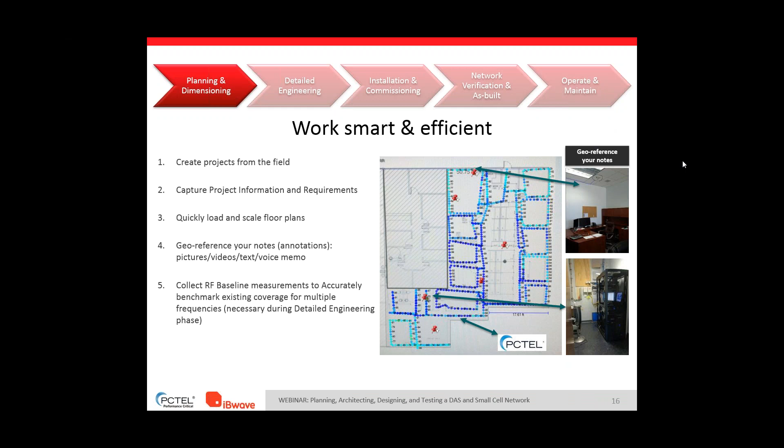So what I'd like to do is go over the best practices, strategies, and cautions of the three types of tests that will be performed during the planning and dimensioning phase of the process. First would be spectrum clearing, done for both DAS and small cell deployments. Baseline survey as well is done for both DAS and small cell deployments. And then finally, pre-deployment CW testing, which will also be done for both deployments.

We'll start with spectrum clearing, and the purpose of spectrum clearing is to determine that the channels being deployed are clear from interference. With new bands being deployed and old bands being used for new technologies, it's really important that spectrum clearing is performed and performed accurately. It's also used to provide clear frequencies for the CW testing that will be done during the pre-deployment CW testing, which is very important to make sure those frequencies are clear of interferers so they can provide an accurate input into the design tool.

Next is the baseline survey.

The purpose of the baseline survey is to identify what the current coverage from the macro site is in the building or venue you're designing. We look for gaps in coverage and use this to determine coverage objectives for the system. It's also used to identify which wireless service providers are in the building, especially for neutral host deployments.

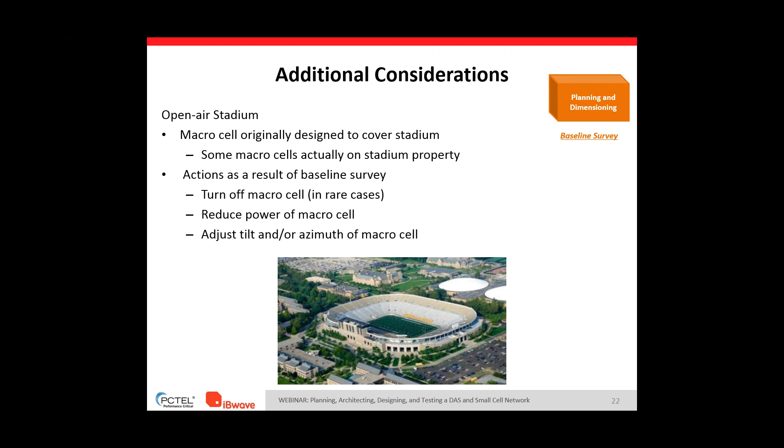For pre-deployment CW testing, the purpose is to determine the RF propagation characteristics of the venue. It provides a very important input to the design tools so they can optimize the prediction models. It can also be used to validate preliminary designs, so we can determine if anchor antenna locations are acceptable for the design.

It can also be used to determine soft handoff locations and percentages by setting up two different transmit locations on different frequencies that are in adjacent sectors. You can determine whether those soft handoff regions will provide the appropriate targets, so your soft handoff areas are not too large and starting to eat up your throughputs.

It's a direct input to the design itself for model optimization. You want to accurately report all intended coverage.

Accurate scanning receivers with high data density is important so that you can make sure you're getting enough data to tune that model. You want to test all bands simultaneously so that as you turn up a CW test, all bands are accurately being modeled, and you understand what the propagation is going to look like in a building, including penetration losses through different media like glass, drywall, wood, cement, floors, and ceilings. You want to collect enough CW data that the models can be tuned for that.

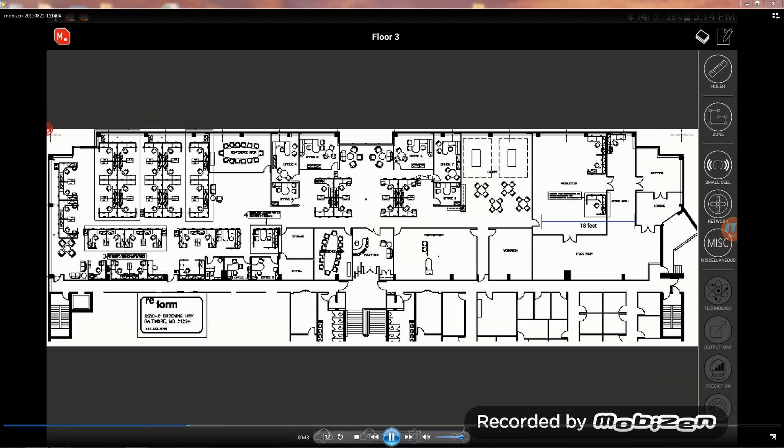So with this, we have several floors, and I'm going to select floor 3. The layout for floor 3 is here, and I've already pre-scaled the 18 feet distance on this layout that you see here. Now I'm exporting this right to SeeHawk Touch.

With SeeHawk Touch now, I have to detect the device, the iBflex scanner, to be able to collect data from it. Right now it's through a Bluetooth connection that I'm finding all the scanners out there that have Bluetooth. In this case, in our building, we have 3 of them. The one I'm using is a 7041 scanner.

So with the scanner now, I have the data imported from the floor plans imported from iBwave Mobile Planner. I'm selecting floor 3. In the interest of time, I have set up a predefined setup, which we call a workspace, defined as the iBwave LTE web. It's the upper 700 C/D band that is in this workspace, and I'm going to plot the RSRP, the reference signal received power, instead of the RSRQ that came up as the default value.

Once I apply this, because that's a very important parameter, I'm now going to do a walk test I've done previously and show that to you. First I'm going to select the starting point on this walk test, which I've done. I'm now going to record that, and I have the option of changing the name of the file of where the data is loaded.

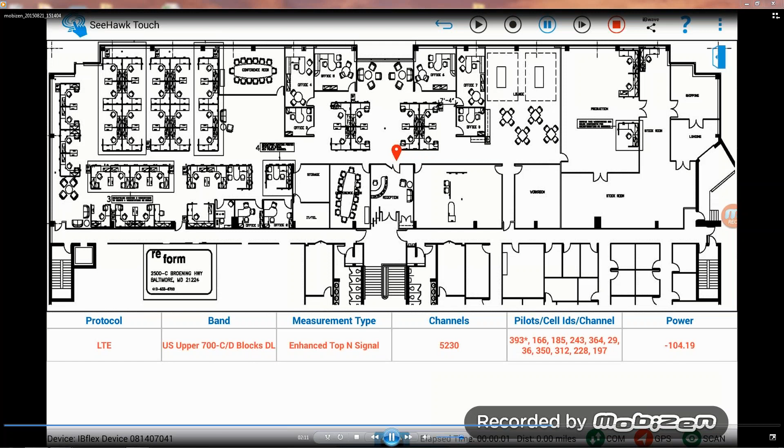And now I'm actually walking the venue. As you can see, the RSRP points are plotted right on the layout of the PCTEL building. I'm doing just a very brief walk test here for this demonstration. Now once I've completed this brief walk test, I'm stopping the scanner from taking the data in SeeHawk Touch.

Now what I'm doing is reloading iBwave Mobile Planner right from our SeeHawk Touch. I'm launching it, and selecting which file I want to import into iBwave Mobile Planner. So I'm selecting the data I've just taken. I've imported it now, and as you can see in iBwave Mobile Planner, I actually have the RSRP data plotted right on the layout of the building.

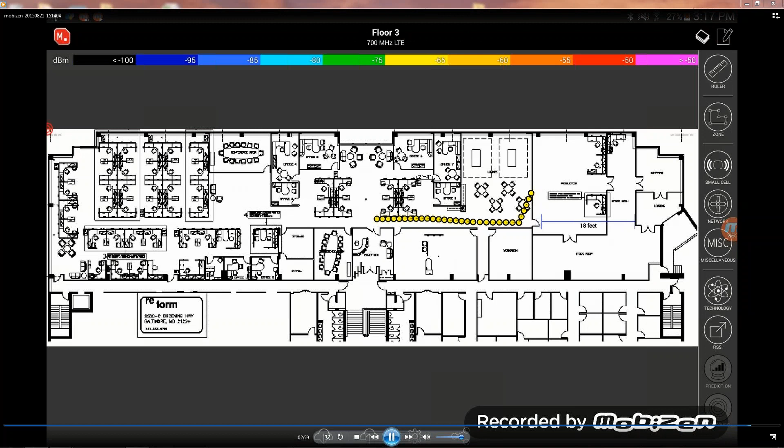And now I'm doing the final export, and it's as simple as that as far as collecting scanner data from iBwave Mobile Planner. I'm going to pass it over to Nazim now.

Thank you, Jim. So really what I want to do now is revert back to the actual case study that we did. We saw the importance of collecting good measurements while you're out in the field, getting good information while you're out in the field.

So now I want to talk about that and relate it to that live case study that we did at the PCTEL Melbourne office. Right now, what I have here is my mobile note application. So I'm going to launch the application.

If you remember, Alex was mentioning before, it really depends on your process. Are you going to start your design first in the iBwave design tool, or are you going to start your design the moment you get into the venue for the first time? So you have both options, and the great thing about these tools is that they integrate completely with each other.

So at any point in time, if I start a project on my tablet, I could open it up directly in my design tool, and vice versa. If I start my project in my design tool, I could open it up directly on my tablet. This really allows proper communication between the field technicians and the design engineers.

So back to our actual case study. For this example, I had nothing at all to start with. I just went to that venue and wanted to try and gather as much relevant information as possible. So the first thing I did was I wanted to have a good floor plan to work with.

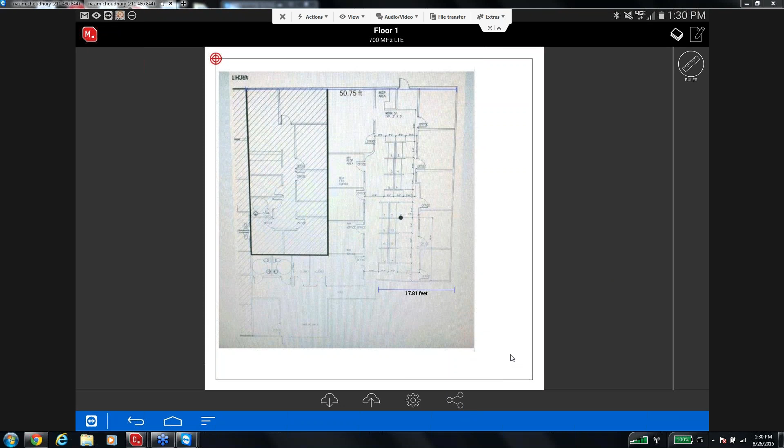So just by clicking on this little button here, it will allow me to activate that collection tool, and it's going to allow me to bring in those measurements here directly. So that's exactly what I did. My first step, I want to bring in my survey information. And as you can see here, now I have my walk test available.

So I brought in that information and already have a good understanding of the outdoor macro network. I could already see areas where it's a little hotter. I could see areas where it's a little colder. So I already have a good visual representation.

One of the great things about working with a collection platform such as PCTEL SeeHawk is that you have the ability of doing multi-band, multi-frequency scanning. So I have the ability of pushing all those frequencies directly into my mobile node application, and I could toggle between these different measurements. If I want to go to, let's say, 1900 now, I could just simply toggle to 1900.

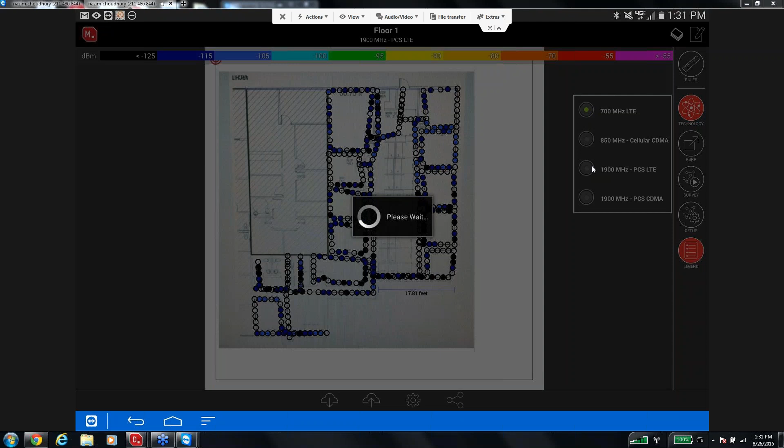And now visualize my 1900 walk. So you have the ability of toggling back and forth, and on this application here, right now I'm visualizing RSRP for LTE, but if I want to, I could also toggle over to RSSI. So I could toggle between the different metrics, and again, if it's a WCDMA or HSPA, we could toggle between RSCP. So that was my first step.

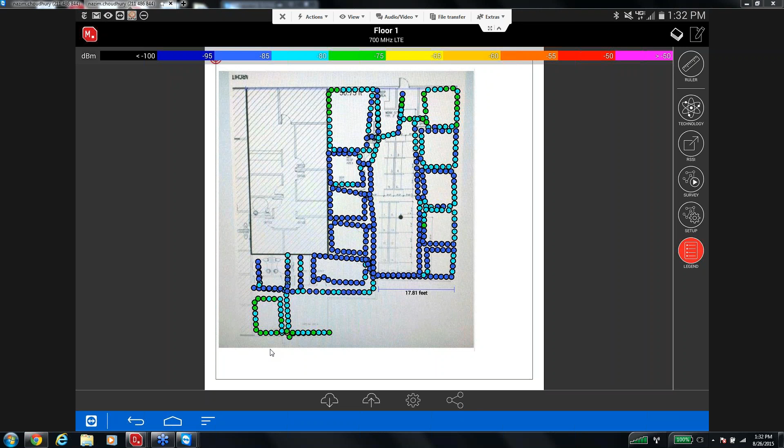I want to bring in good macro information. So now my next step would be to actually get good physical information about the venue, such as where I might want to place antennas, where my head-end room is, where I want to place my equipment, where I'm going to have risers. So I want to gather all that information. And already I could see here that maybe I might need to put some equipment here just to make sure that I'm going to be dominant in this area. So that was really my next step, to start getting physical information.

So to gather physical information, we have the ability of using different push pins. Now, what each of these push pins represent is it allows us to highlight what's going on in a certain location. So let's say, for example, I saw that there's a conference room in this area, executive office. I know I'm going to need good coverage in those offices, and I also want to visualize what those offices look like, what those rooms look like.

So I dropped a push pin, and that push pin allows me to document what exactly is going on in that location. Just an example, I have the ability of annotating it with a picture, a text message, a video message, even a voice message. In this case, I used a picture, and I took an exact snapshot of the area. And even on this tool, I have the ability of taking notes directly on it. So from this picture, I want to highlight where the antenna is going to go, what the cable routing is going to look like as well.

And oftentimes when we speak to field technicians, they usually mention they like jotting down notes, they like taking notes directly on floor plans. So we have that capability as well. We have a markup layer, if I could show you right here. What this markup layer does is it also allows you to get different information about your venue and just quickly jot it down with your pen. And for me, what I used it for is I want to show where there's ingress-egress areas, where different material compositions, where I saw there was plaster, where I saw there was glass, and I even want to highlight potential cable routing locations that I saw at the venue.

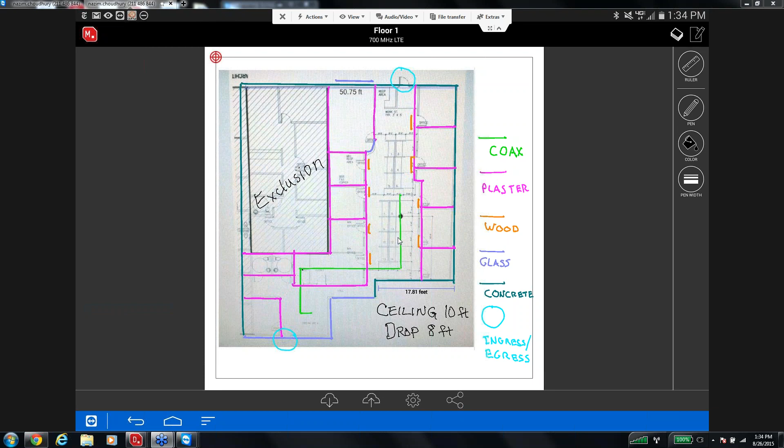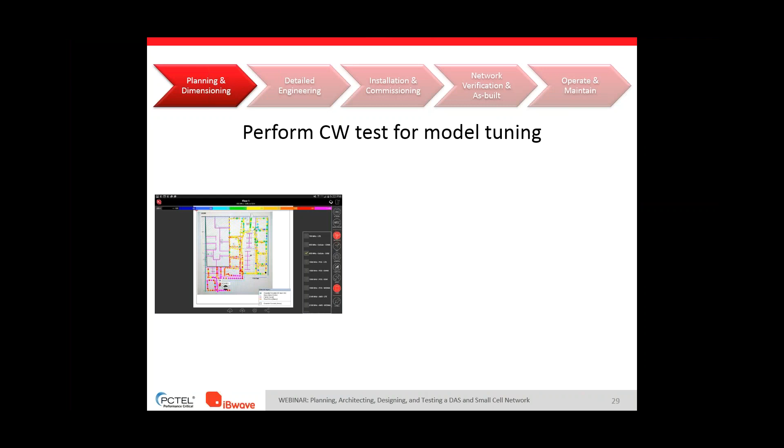Thank you, Nazim. So far we covered exactly that, right? The importance — folks from PCTEL covered how important it is to capture the appropriate CW test data. We showed the integration. There's other things that you could also do with mobile, where you could also put an annotation as far as where the transmitter is located at, and then document important information that we mentioned earlier, like height, azimuth, any tilt, model of antenna you're going to use to get this information to your RF engineer. We also have the ability to go ahead and take a picture of the CW equipment and verify that it's being used in the correct way.

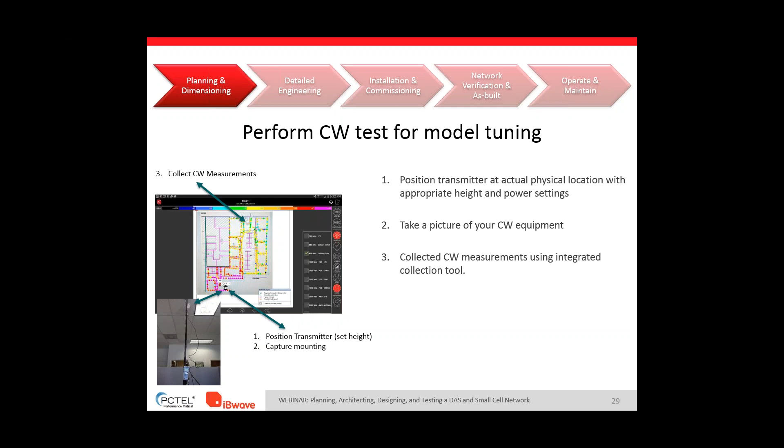And we showed the integration with PCTEL to go ahead and collect the CW measurements, being able to visually see it back onto iBwave Mobile. And then now what iBwave Mobile also allows you to do is go directly to design. In the past, what you had to do is use some kind of tool like PCTEL, collect CW test data, export it, post-process it, and then have it in some kind of generic format to import it back into iBwave per band. So now there's a lot of time being saved where you go directly from mobile node, do that integration with PCTEL, and send it directly to design.

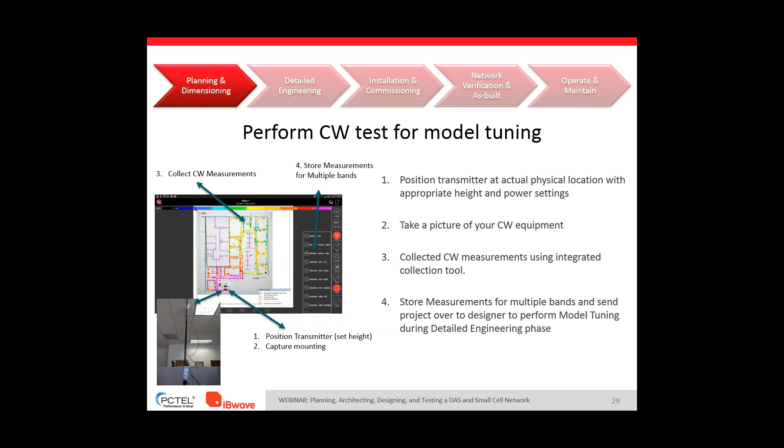So you have the ability of streamlining that process. Once you have it in design, you have the ability of loading this CW test data into our environment, and we could do various things, like validating that our walls are modeled correctly with appropriate losses, or we could use this information to calibrate our model along with the materials, either or, depending on what we want.

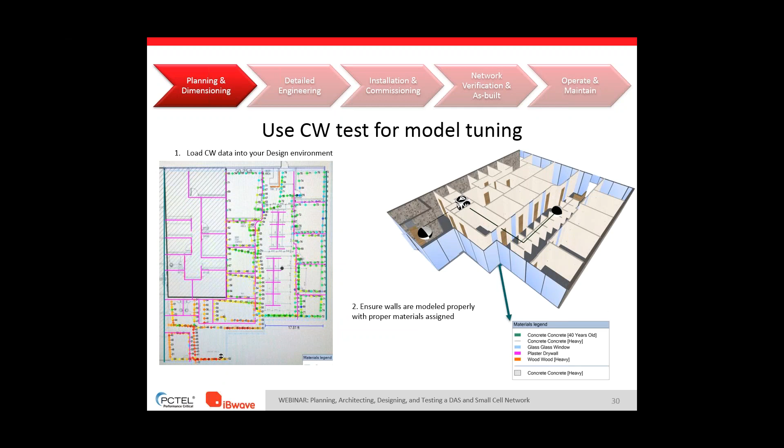Inside of iBwave design, we have an engine where you could go ahead and create different kinds of calibrated models. You also have the ability to document it, so you could use it for future designs. We also have a couple reports available that you could use pre-calibration and post-calibration to see how much you have improved in things like mean error, standard deviation, and absolute mean error.

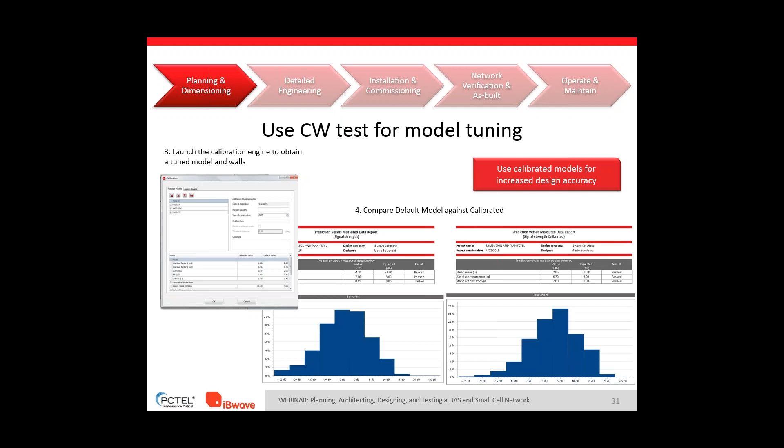So having calibrated models is going to reassure us that we have the accuracy that's needed to go on to the next step for detailed engineering. So let me pass it real quick back to Nazim so he could go ahead and show a quick demo on how this is done in design and mobile.

Thank you, Alex. So I wanted to come back to my exact same file. I want you to think of this file kind of as a container. So we collected all that information, and it's still available and stored on my file. I could easily access it just from these different layer managements. So if I want to see my markups, my annotations, I could just turn them on again.

So the next step was we had our baseline data. It's still stored and saved on this file. The next step would be to start looking at our CW data.

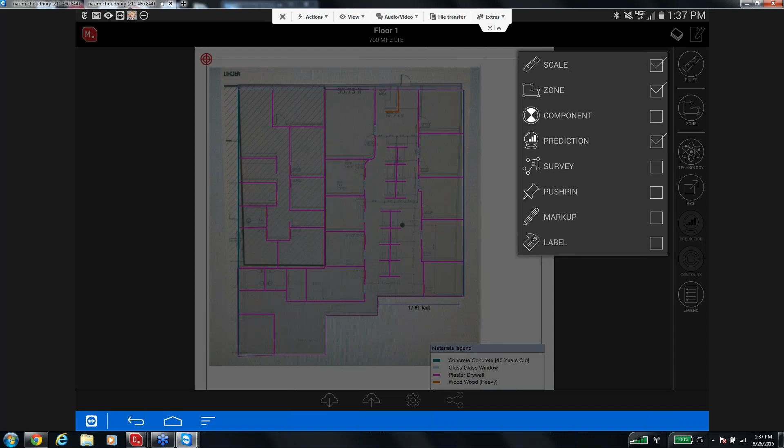Again, as Scott was mentioning before, a key factor when it comes to CW testing is you want to make sure that you have your components, really document where you placed your components, as well as the height of the component, the power of the component, and just really document that information, because your CW test is going to be really dependent on where you placed it, the power coming out of it, the height of the component. So we really want to document that.

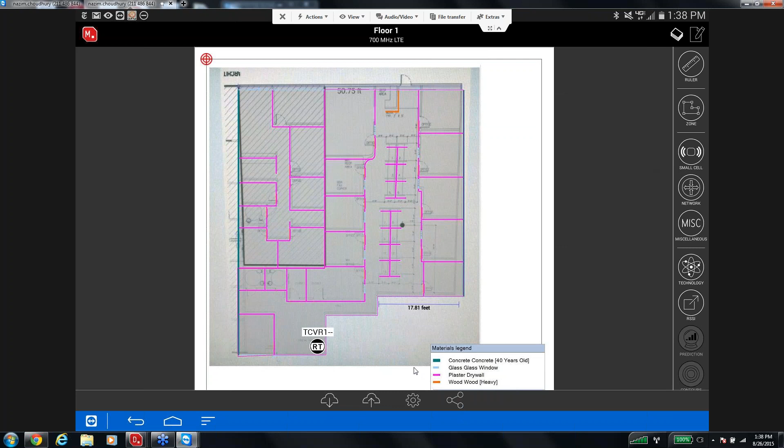And that was the first step I took. I placed my CW transmitter, I placed the height, I placed the power coming out of it, just so I could properly document it. And then again, with the PCTEL SeeHawk integration, I was now able to bring in that CW data directly.

So if I come back here, and I turn on my survey measurements, and this time my survey measurements is labeled as CW. So if I want to revert back to baseline or pre-install, I could revert back to it as well. But now you can see I could visualize my CW testing. And again, like before, we have the ability of seeing our CW test for all different frequencies that we've done the testing for, so we could toggle between them and really start visualizing it.

So this was the next step. We want to get good CW measurements, and now on our floor plan we could visualize, already we could take a look at it closer to the transmitter. We're seeing strong signal, and we could see it fade along with the path loss. And this is also going to allow you to verify different materials that are in place. Let's say we had a metal wall here, we would have seen that the signal will degenerate in that area.

So in these first two steps, really what I did was I collected and gathered as much information as possible that I could pass on to the designer so he could make a very well thought out design.

So if you just think about the traditional process, there's a lot of steps that you previously had to take. You had to take out your digital camera, take out all your photos, resize them, relabel them, reference them to your floor plan, then scan your floor plan, and then when it comes to survey measurements even, you have to go through another post-processing step, convert it into CSV, and then bring it into iBwave design. So there's a lot of time that was taken even after you leave the venue.

So we want to really automate all those additional steps, and just by the simple click of this button, I could send all that information over to the designer directly. And that's what I want to come to now. So I'm going to come back to my design tool, and really what I did was I opened up that same file that was being worked on in the field in my design tool.

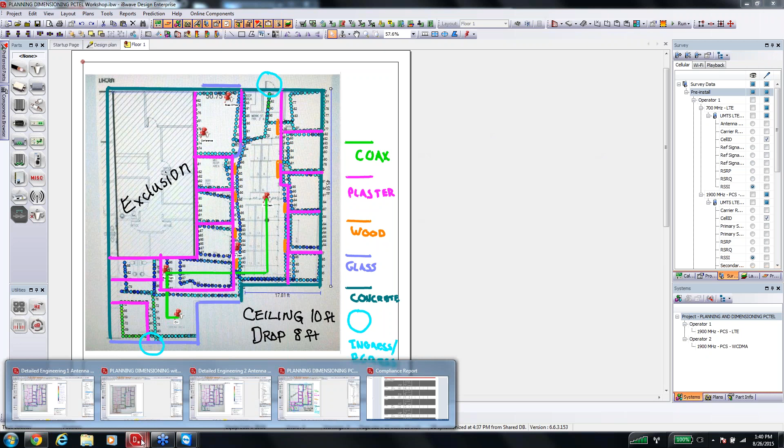As you can see here, I already modeled these walls. And if you want to verify the wall was modeled properly, you could always visualize it in 3D.

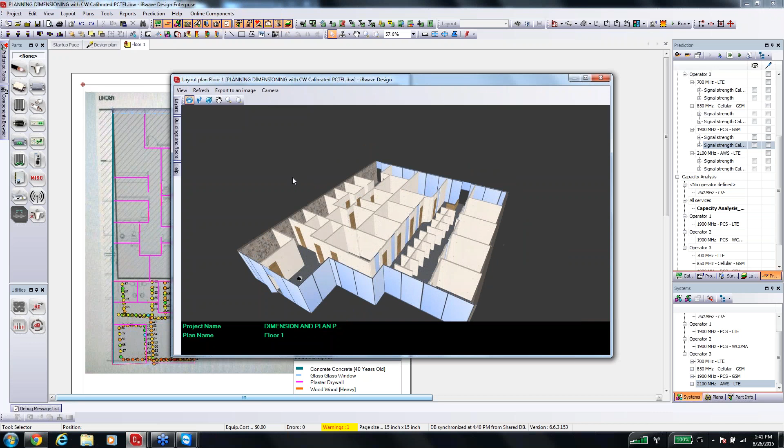Once I verified all my wall materials were in place, the next step I want to do is bring in my CW data so I could fine-tune and calibrate my propagation model. Here you can see I have my transmitter back in place, already labeled with the right location, height, and power, and I have my CW walk.

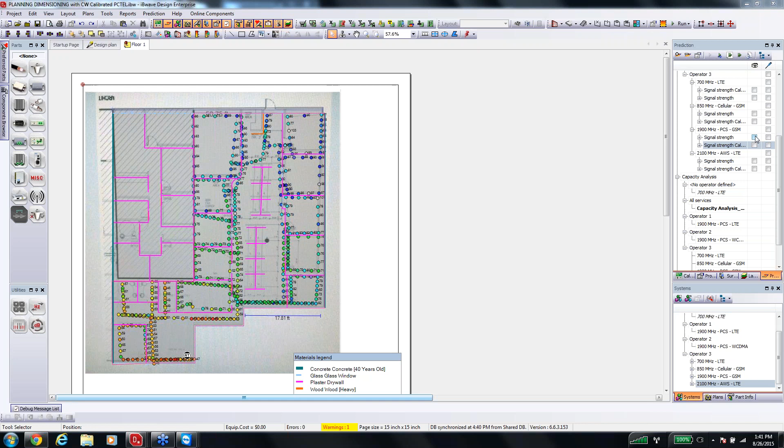Now, to show you the impact of calibration, I want to show a prediction before calibrating and a prediction after calibrating. So I made a prediction based on this transmitter, and I have it right here. Once I enable it, I can make a visual representation.

Already I can see that my prediction seems pretty accurate. Areas where I see it's blue, it's blue. Areas where I'm seeing it's green, it's green. So my prediction is already pretty close to that CW data we saw in the field.

But since we have that CW data, we want to attain an even higher level of accuracy, and that's why we fine-tune and calibrate our propagation algorithm. So that's exactly what I did - I took those CW measurements and fine-tuned and calibrated my propagation model.

So again, we have an option here - we could simply come to calibrate. Since everything was in place, since all my CW measurements were in place, this was really just a one-step process. Just to show you the impact, I'm going to run my prediction again.

Now once I run my prediction, I can see that my colors are a lot more similar to my survey measurements. Areas where it's blue, it's a lot closer to blue. Areas where it's orange and yellowish, it's a lot more closer. And at any point in time, you always have the ability to report how well your accuracy was in terms of mean error and standard deviation.

So that was my next step - I want to have a fine-tuned, calibrated propagation model before going into the next phase of detailed engineering. I'm going to let Alex speak a little bit more about that detailed engineering phase, so I'll pass it back to him.

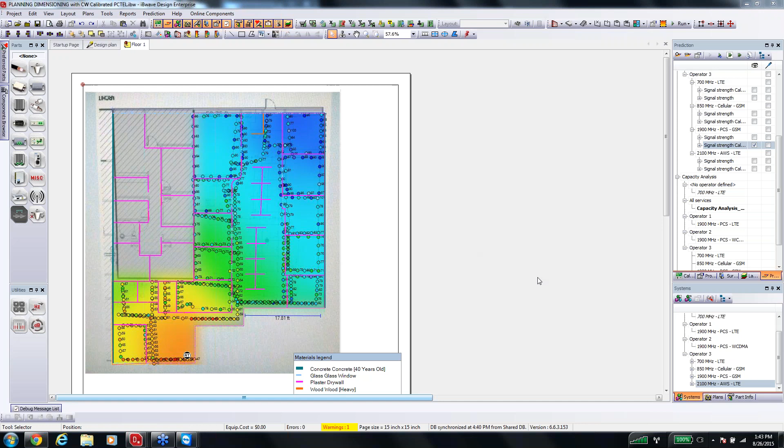Thank you, Nazim. So now that we have everything calibrated, we could go on to our next step. There's a couple of things we already saw benefits to. One is being able to capture this information using mobile and the integration, let's say through PCTEL, and then using the cloud to send that directly to the RF engineer using the design tool out in the office. So this is a big time saver too.

But in the detailed engineering tool, this is also the section where we want to better understand our KPIs. Typically we have to satisfy some kind of requirement, let's say for RSRP, RSCP depending on the technology, also for SINR, RSRQ for quality. And nowadays too, we have to have some kind of dominance over macro.

This step of detailed engineering is also the section where we're going to determine what kind of equipment we want to use, based on maybe things like budget or whether we want to future-proof our solution. So we could go ahead and take different scenarios into account, because at the end of the day, we want to make sure we design the right system.

We want to make sure that we're not under-designing, because obviously then we're not hitting our KPIs or our service level agreements that we're trying to achieve. And we also don't want to over-design, because this means that we're going to be using more material and additional not-needed costs for a project.

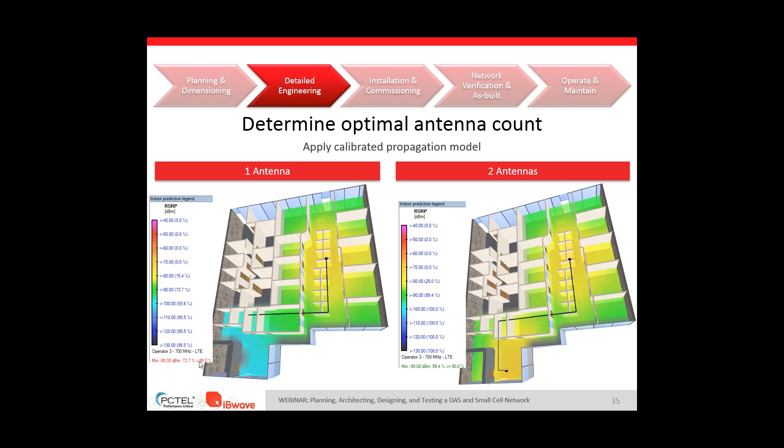When it comes to RSRP requirements, we have the ability of adding a feature to see whether we're reaching the requirement or not. In this case, we have a minimum of -90 over 90% of the floor plan, and we're not getting to that requirement with one antenna, whereas with two antennas, we are getting to that.

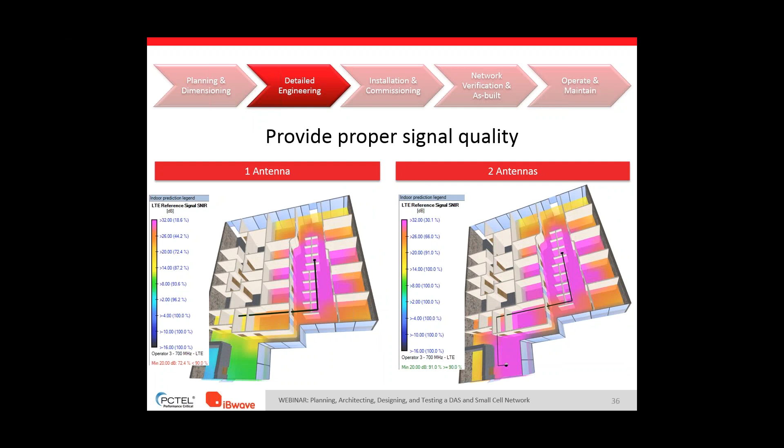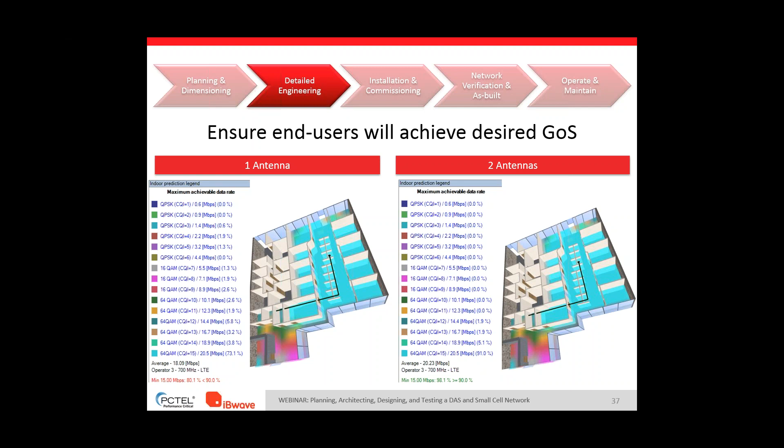We'll also look at other things such as signal quality, to see whether we're reaching that criteria or not, and obviously our signal quality is going to determine our throughput. So we have a good understanding of whether we're achieving the throughputs we were meant to be achieving in our design. And very important nowadays, we have to have some kind of dominance.

The dominance over macro is going to tell us how clean our signal is. Again, today it's not too much about coverage, but you want to have capacity, so you're adding additional systems. You want the throughput, well, you have to have a clean system. We have to make sure that the indoor solution dominates, typically we see from 5 to 10 dB.

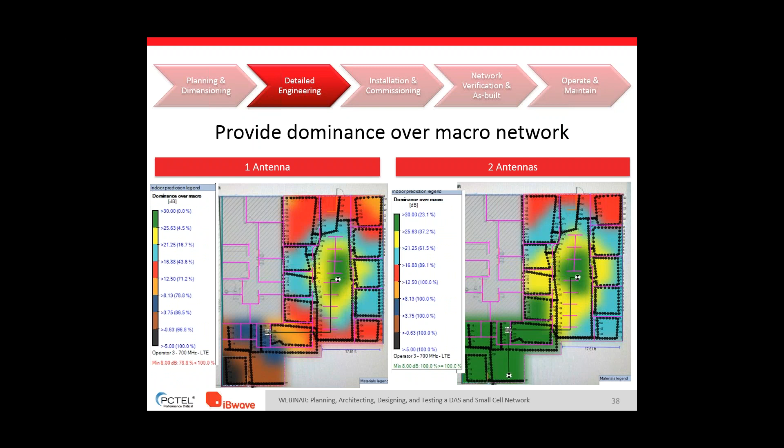So you have output maps that you could go ahead and use for that. On the previous ones too that I showed, even though they're in 3D format, you can't see it, but they were taking walk tests into consideration for that too.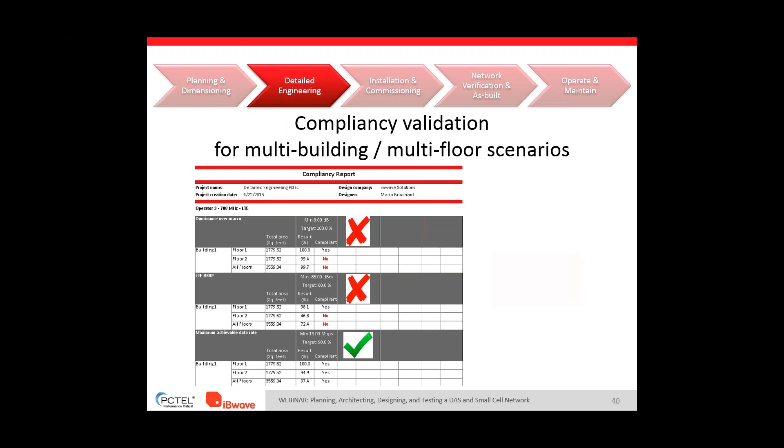But real quick, what we're going to do right now is I'll pass it back to Nazim so he could do a quick demo on this section.

Thank you, Alex. So this is my last portion of the demo, and for this example, like Alex mentioned, the first thing we want to do is understand our client's KPIs and then simulate them and see if we're going to be achieving those KPIs. So that's really the first thing I did, I first looked at the KPIs that are important to the client.

I generated heat maps for them by putting in the criteria that I know I need to achieve. This was a smaller venue, but think of the whole process for larger venues, the same exact process can be utilized.

For this first step, I did a more iterative approach. I started off with one antenna, and I wanted to see what kind of results I'll be achieving with one antenna. So that's what I did. I started to run my KPIs.

The first one I took a look at was my signal strength. And just by running my signal strength, I'm already seeing I'm not achieving that appropriate KPI. I wanted a minimum of -70 for at least 90% of my venue. I only achieved it 80% of the time, and that's already a bad indicator.

So if I move on to my SNIR, my signal-to-noise interference ratio, I see that was not achieved either. I had a minimum of 20 dB, and I only achieved that 72% of the time when I really wanted 90% of the time. So what this is going to relate to is I'm not going to be able to achieve my actual quality of service, my data throughputs. As you can see, I wasn't able to achieve it.

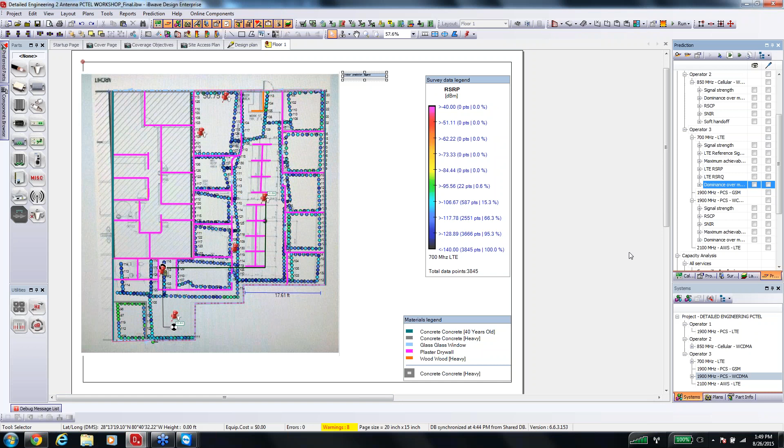And now when I visualize my KPI, I can see that I'm actually achieving all of them: my signal strength, my signal-to-noise interference ratio, my data rates, my RSRP — they're all being achieved. And even if I come back to dominance, now I can see that I'm actually very dominant throughout my entire venue. And even my criteria, I wanted a minimum of 8 dB dominance for my entire venue, and I actually achieved it 100% of the time.

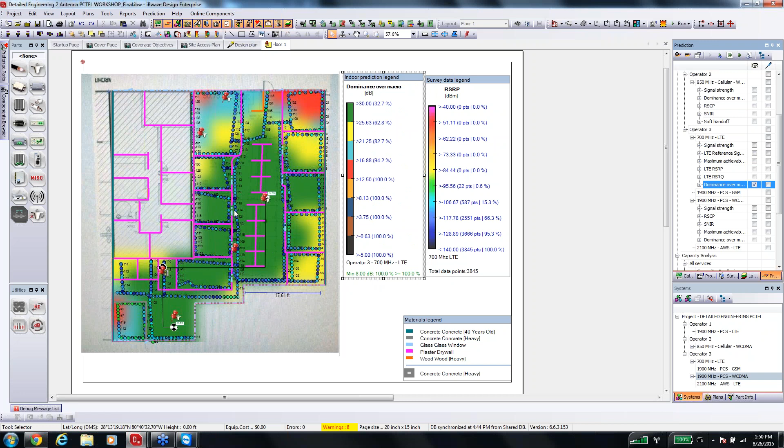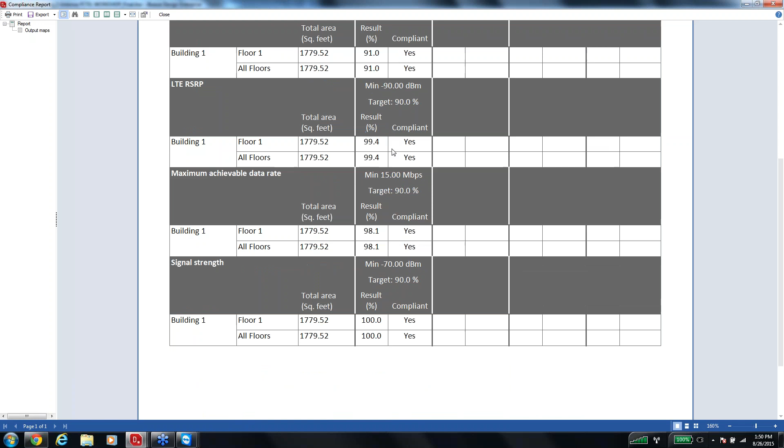And also what Alex showed us was we had the ability of running a quick compliance report, and this is really meant to help you analyze all your floors for your entire venue, for all your different KPIs. So think of a scenario where you have maybe 10, 15 floors — it's going to be very difficult to go from one plot to another, from one floor to another. So we have this summation page that's going to show us all our different KPIs and whether we actually achieved it or not. This is something we want to present to our end clients: we did all the necessary work and we achieved all your specific requirements.

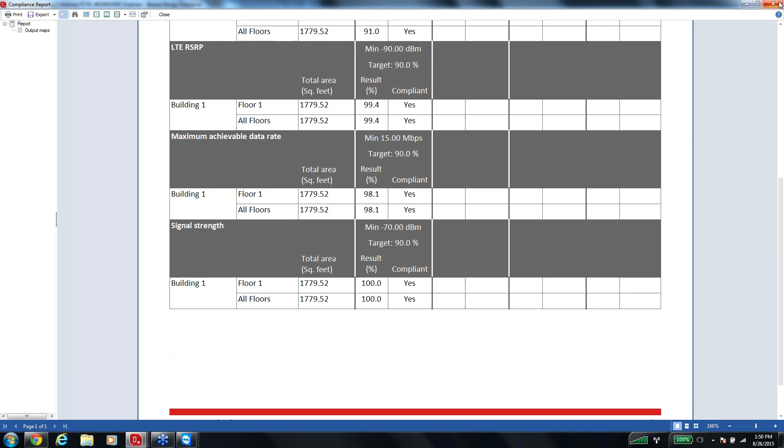And the last point I want to make — again, keep in mind, as I mentioned before, think of the file that we started working on as a container. That container is going to contain all that information starting from my first visit at the venue, so I have all that available to me in my layers. If I want to visualize my markup layers, I could quickly turn them on. I have all my different survey measurements going from baseline to CW, and later on I could bring in validation as well. And finally, when it comes to all our documentation, we could easily pull out a report just to highlight everything that we documented in that venue, in a report type format.

So again, as I was mentioning before, we don't have to take out our digital camera anymore, take out our pictures, label our pictures, resize them — all that is automated now. And even if you want a higher level of automation, you could put your own company backdrop here and even export it into PowerPoint if necessary.

Now, this was the last part of my presentation for the live demos. I'm going to send it back to Alex just so we could give a quick summation of what we spoke about today.

Okay, thank you, Nazim. Real quick, key takeaways from today's presentation: we saw how you could go ahead and use tools like iBwave Mobile Note to digitize your site survey notes, and obviously the RF collection part for savings in deployment time.

PCTEL covered the importance of proper RF information gathering with correct methods and hardware such as PCTEL SeeHawk Touch. And then we also saw the usefulness of exporting both site survey and RF data directly to iBwave Design to expedite our process when it comes to detailed engineering. So that was what we want to focus on today.

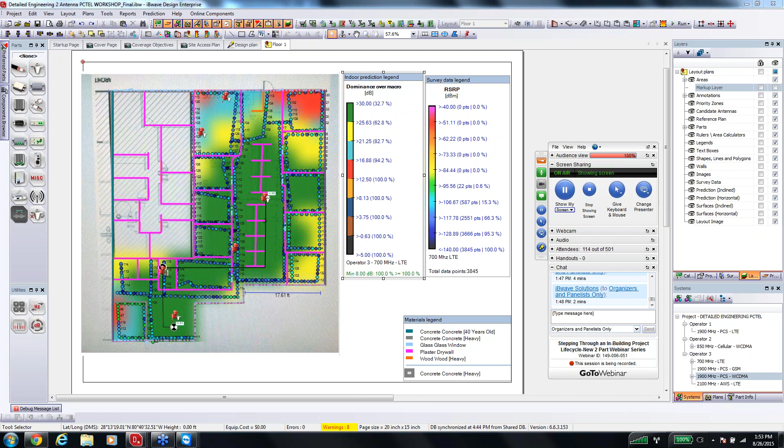This was the compliancy report. At any point in time, you can come to reports and compliancy. Once I run a compliancy report—in this case I only had one floor, but if I had multiple floors—I have the option of visualizing any of my coverage maps along with the criteria I had, and it's going to tell me for my floor if I achieved that criteria and by what percent. In this case, for building 1, for RSRP, I achieved my minimum negative 90 for 99% of the time. Now if I had many floors, I have the option down below to show all floors and show cumulative coverage for my entire building. So that's the different ways—not only can you see cumulative coverage, you can narrow it down floor by floor as well.

Thank you, Nazim. So I have another question. It's about amplification and repetition of external signals versus generation of signal in indoor environments. Which solutions to use?

Yeah, this is Scott, I'll take that one. I believe what they're asking is whether you'd want to use a repeater-fed DAS versus a BTS-fed DAS within a building. With a repeater-fed DAS, if you're looking for just coverage—extending coverage into the building without increasing capacity—then a repeater-fed DAS will work just fine. But when it comes to offloading capacity from the macro sites, and building capacity into a building that has a large number of people, it's important that you have a BTS-fed DAS to offload that capacity from the macro sites and build enough capacity into that building to handle the users within it.

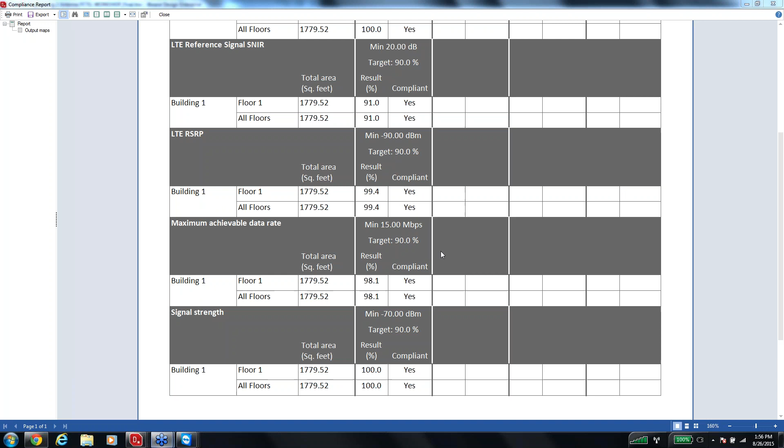I'll take that one as well. CW testing for propagation model tuning is very important, no matter if it's done for a macro site or an in-building site, whether it's for a small cell or a DAS. It's very important to understand the propagation characteristics of the environment you're designing to, whether in-building through different types of media, or external to a building and how it's going to penetrate into it. So it's very important to do CW testing anytime you're doing design using a propagation model, to make sure those models are tuned properly and your predictions are accurate.

Thank you, Scott. We have room for one last question: does the SINR prediction take the macro coverage into account?

Hello, hi, I'll take that question. Yes, definitely the SINR prediction takes that macro coverage into consideration, and that's one of the key points of bringing in the baseline test. When we did the baseline data and brought it into our plots, that was really one of the purposes, because we wanted good, accurate prediction for not only our SINR but also our data rates. So our SINR considers the macro signal coming in from that outdoor network.

I'd like to add that today we talked about taking the macro into consideration from a walk test, right? But in design, there are two other ways to take the macro into consideration. We also integrate with macro planning tools such as Forsk and Atoll to take that into consideration. Or the third way is just to tell the tool, assume it's negative 75 around all the buildings. So those are other ways to take the macro signal into consideration for plots like SINR.